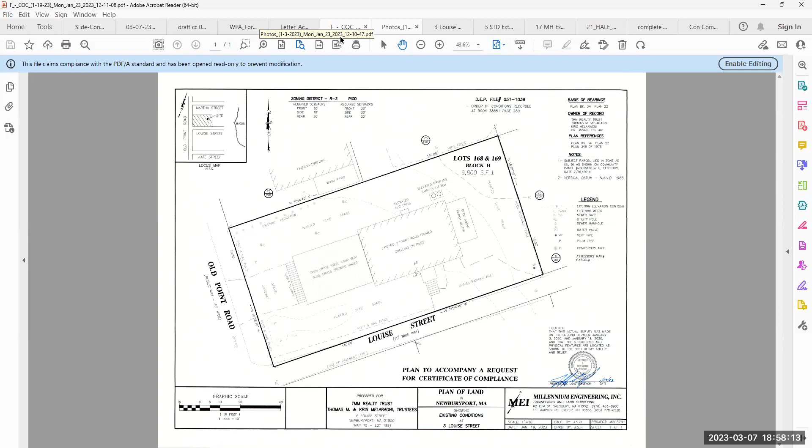So I'd like to address any questions the board has, or concerns or comments that were not addressed. Can you scroll down the photos, Julie? You can see, just to point out, this is the open metal grate ramp into the garage. Can't see under it from that angle, but they had proposed...

Oh, that's plum bushes, right? Yeah, they planted some sticks there, plum bushes. Yeah, they're just in the growth stage now, growing.

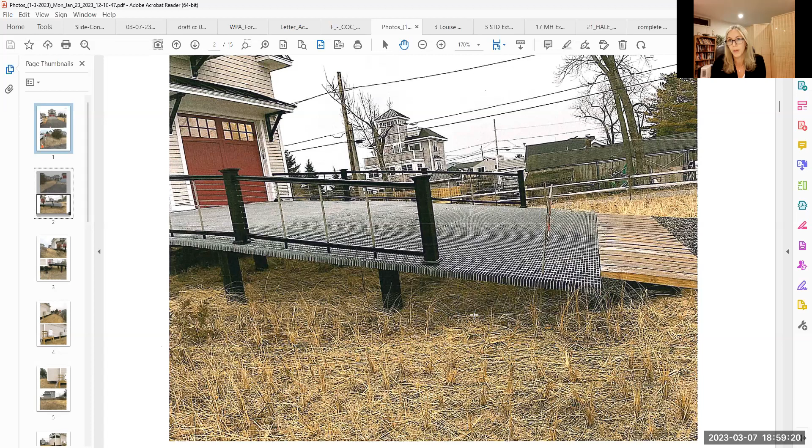So the key was that they needed to have vegetation growing underneath this ramp in order to satisfy the requirements under the ordinance for vegetated area. They needed 35% of the area underneath the ramp to be vegetated in order to meet the requirement. And as you can see, it's pretty much 100% vegetated under there. It was almost an experiment to use this kind of situation to get into the garage, but it worked extremely well because the water and light can get through and everything is taken care of underneath there really well.

Yeah, water and light can get through there, so that's a good thing to see. I didn't remember that was a grate ramp, but it is a great ramp for this sort of situation. Thank you.

No, those plantings, it all looks good. Yeah, the tanks are elevated. Tanks are elevated.

So, I mean, this project came out really well, I think, having seen the site. Basically everywhere, every area of the property is vegetated outside of the driveway. And then there's an additional parking area, which is noted in the letter from the engineer, that the driveway off of Louise Street is gravel and larger than shown on plan. And that's true.

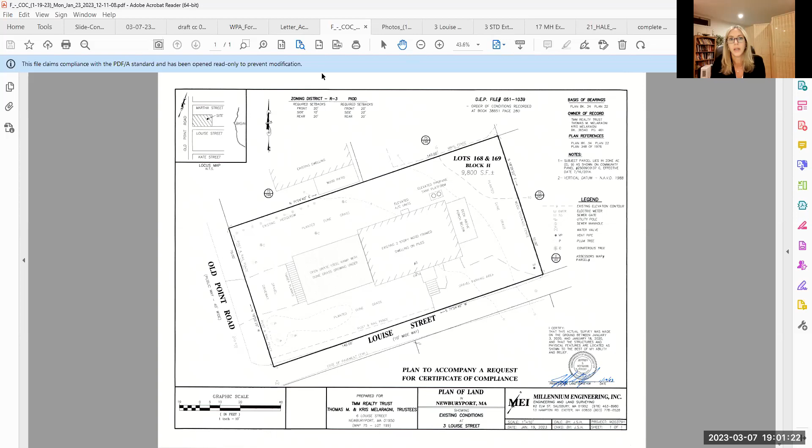Tom Millerani went back and redid all the calculations to make sure that there was still enough vegetated area on site, given this new expanded parking area, and they are still significantly above the required amount and the proposed amount of vegetated area on site, even with this added gravel parking area, which is shown right here.

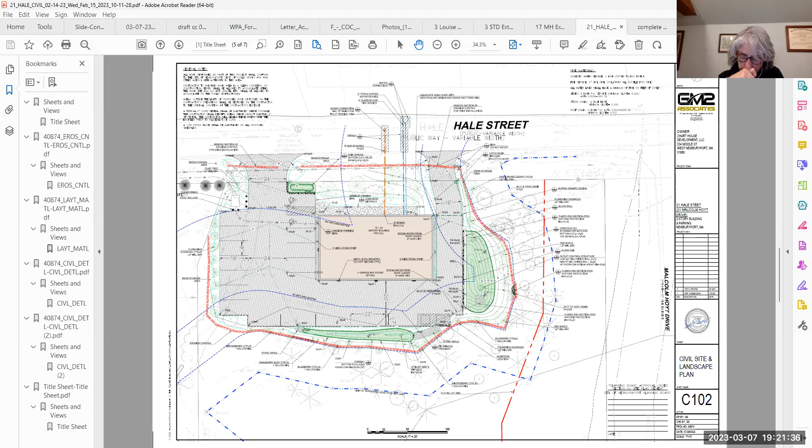Hopefully that answers the question, but I think giving you those numbers is fair. We tried to only portray the numbers in the light of how they fit within the regs as it pertained to the overall parcel, because that's how the regulatory analysis laid out. But I think considering the other numbers makes sense too.

Okay. That work for you, Bill? Yeah, I've got a couple other questions as well.

I guess you'll be up in the hardscape numbers due to the second access as well, of course. Yeah, I believe so, though I don't think it makes a huge difference. We'll be giving you a complete update prior to the next meeting with the updated plans. I'll update all the numbers in the NOI narrative and give it to you in red line strikeout so you can see what changed with the fire department access.

And is there a reason that has to be bituminous pavement versus gravel? I think there's a number of different issues. One is if it's gravel, it needs ongoing maintenance and you're going to have vehicles coming and going. I think because of its use, bituminous makes the most sense given the amount of use and where it would be.

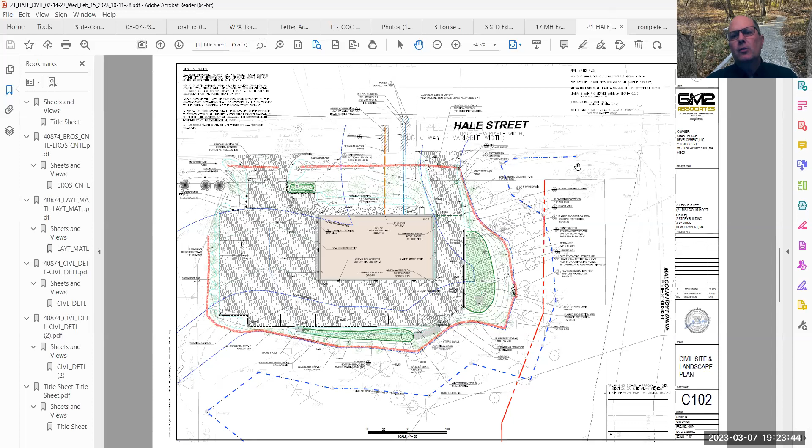Julie, can you flip to one of the plans that shows the whole parcel? You're looking at an industrial park plan on a 20 scale, which you're not typically used to seeing—normally you'd get about a 30, 40, or 50 scale because the buildings are so big. What we're talking about is not a very huge development, so it's not an awful lot of pavement.

We are collecting all that water, treating it, and it's all going into a stormwater wetland. The stormwater wetland itself is probably one of the most ecologically friendly ways of handling the stormwater—it's vegetated as a wetland and provides really good treatment.

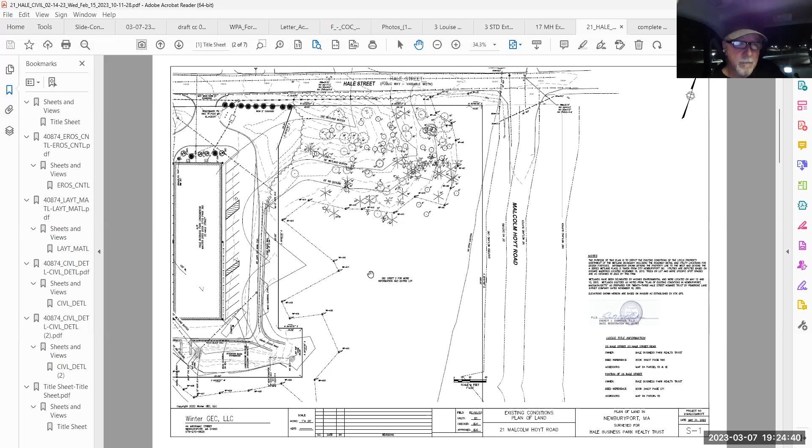Okay, if you can see the building on the left—yeah, we're talking like a third of that in terms of size. It's a much smaller development. I thought there was one that showed the whole thing, but...

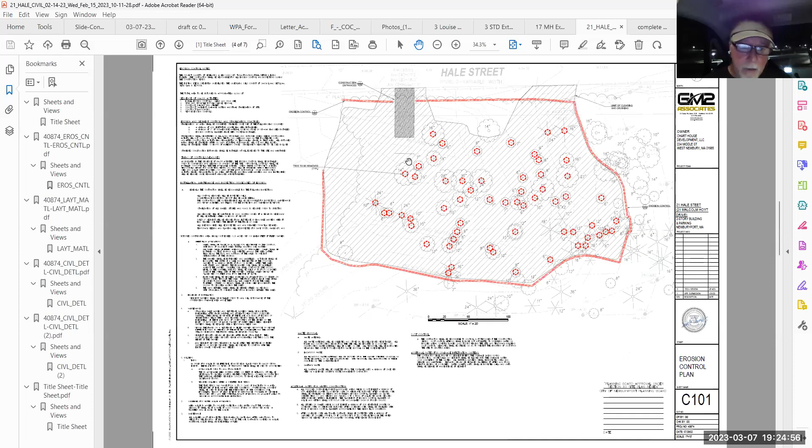Just one additional comment—this isn't an objection or anything, but it looks like maybe 70 or 80% of that lot A4 is already a wetland. So the only development potential it has is just in that sliver in the northwest portion of the site, not where the hand is. Let me see—yeah, down there.

Yeah, and I think we showed in the first hearing how that is connected to upland on the adjacent parcel. So if we didn't do a development and provide the city with this land, the only other potential use would be if it were sold to the adjacent property, and then they could go in there. Obviously they'd have to meet all the performance standards, but the wetland between that and Malcolm Hoyt doesn't protect that area from development. Still, it's a beautiful little upland area.

Not entirely little—I think it's bigger than the building site we're looking at up along Hale. And during the site walk, we saw it's a really nice spot. What we'll be doing is creating, prior to transfer, a mowed path with a way to cross the stream for the city if they choose to continue mowing that path, and I think that could conceivably be used for people to go for a walk out there and enjoy it.

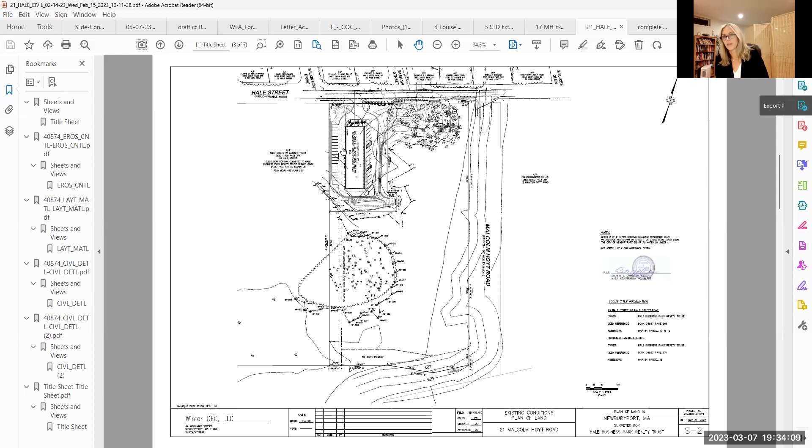I think that makes sense. Okay, so with that, I'll change my request to continue to your first meeting in April. Okay, I'll amend the motion then to continue to April 4th.

Second. All right, roll call: Charlie Lovisetti, yes. Steve Moore, yes. Carol Wagon, yes. Bill Mullen, yes. And I vote yes. Thank you all so much. Take care. You too.

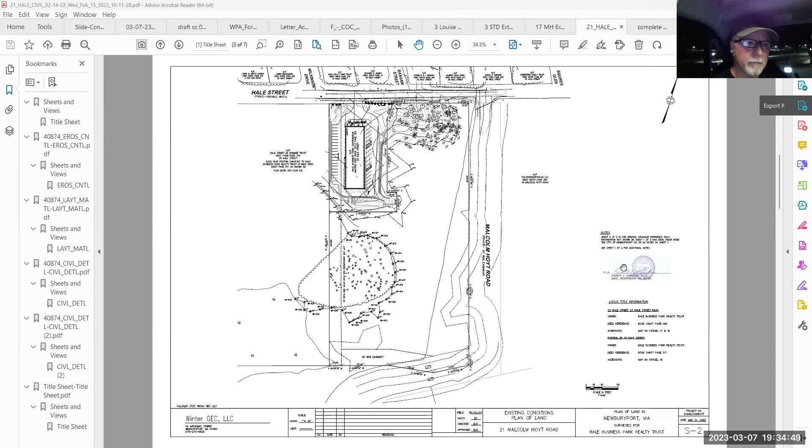All right, can I get a motion to close the public hearings? So moved. Second. Roll call: Charlie Lovisetti, yes. Steve Moore, yes. Carol Wagon, yes. Bill Mullen, yes. And I vote yes. All right.

Do we have anything else this evening we'd like to discuss? One quick item under old business. I don't know if any of you got my email earlier this afternoon. It was a little late, but we had talked at the last meeting about a letter of support for the CPC grant application associated with Colby Farm Lane Meadow.

It's for improvements at the meadow: removal and replacement of that awful dilapidated split rail fence, putting up some signs or a sign at the trailhead, and a kiosk with information about the site and habitat, etc. And then also identification of a location for, and construction of, a new public access trail going in and around this open space. So I drafted this letter.

Looks good to me. And you guys all know what's going on, yes? So I'm gonna make Steve explain it to you. Me, here on the committee. Yeah, but you're one of the promoters, man. Yeah, there's a - what was it - $51,000 request for CPC to...